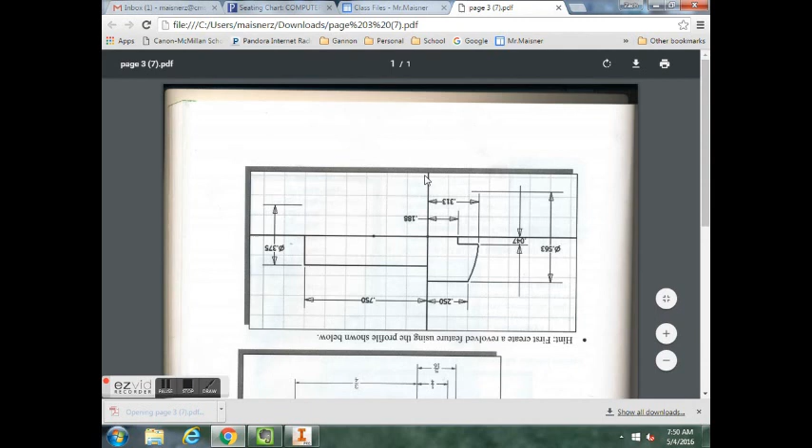If you download that PDF, it's upside down, so just hit the little arrow button so you can rotate it around.

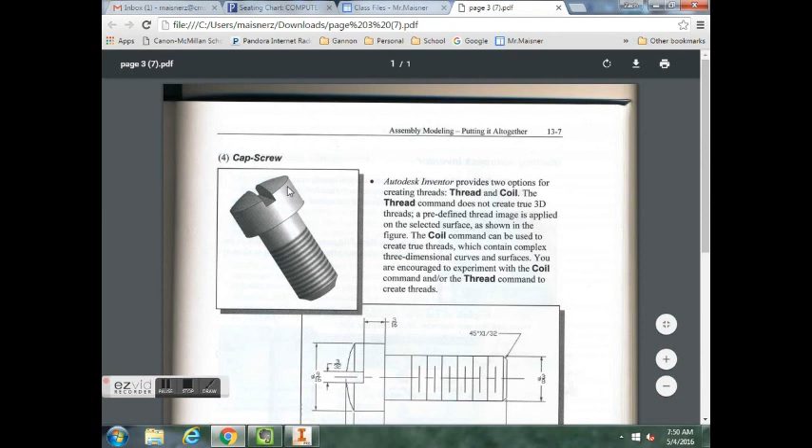This is what the cap screw is going to look like. There's two different methods to do it. We could use the Revolve Tool, create this bottom drawing, revolve it on a center line, or we could just do it the way that we're used to by drawing circles up. We're just going to stick with that method for right now. We're going to use these measurements up here in this top part of the drawing. This down here is for using Revolve Measurements, and this is the typical way that we're going to do. So we're going to use these.

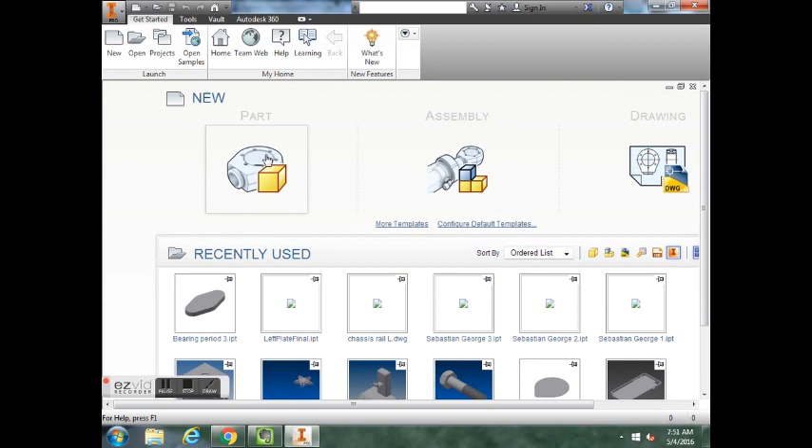So let's go into Inventor, start a new part.

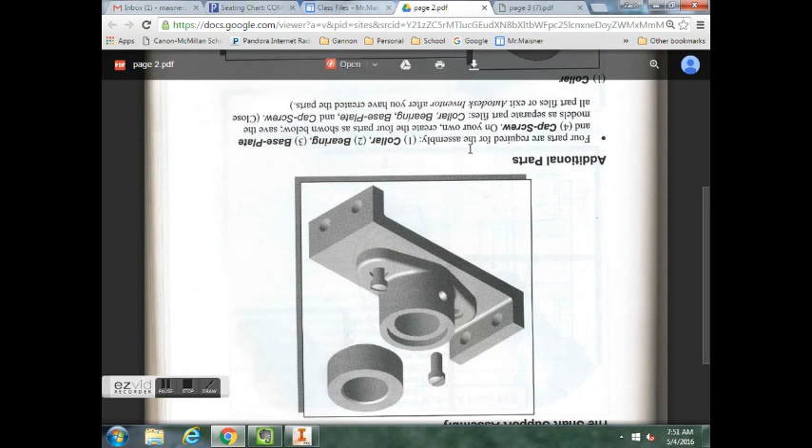Since the cap screw is going to go onto the part straight up and down, if you look back on page 2, I think, this assembly, you can see that the cap screws are going to be up and down, even though this is upside down again. But we're going to select, if you start a 2D sketch, we're going to select the top plane, so that way we can build the screw on a vertical.

So we're going to select this XZ plane, rotate it down. You don't really have to, but if you want to.

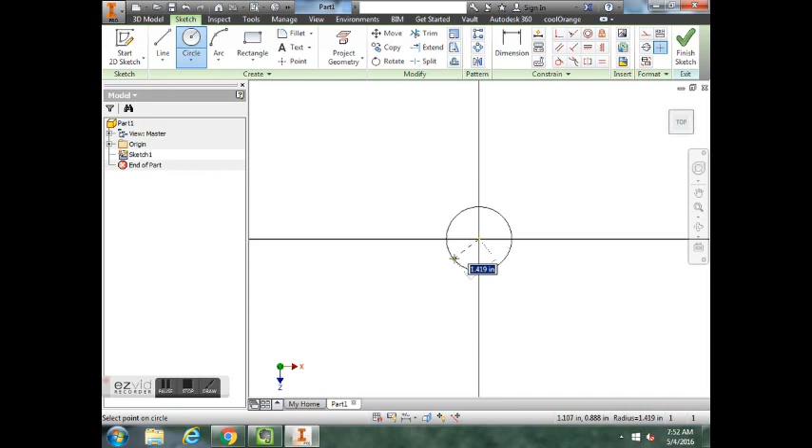So we'll start with a circle in the middle. Wait for that little green dot to pop up. Left click once. As we drag our circle out, we'll look for the measurement on the PDF page.

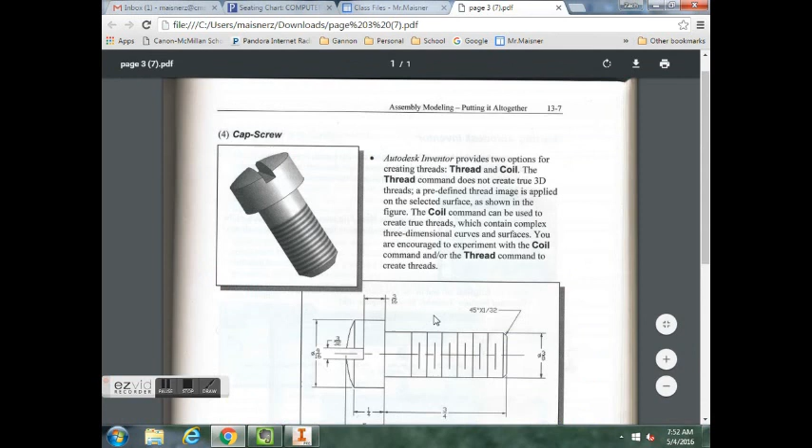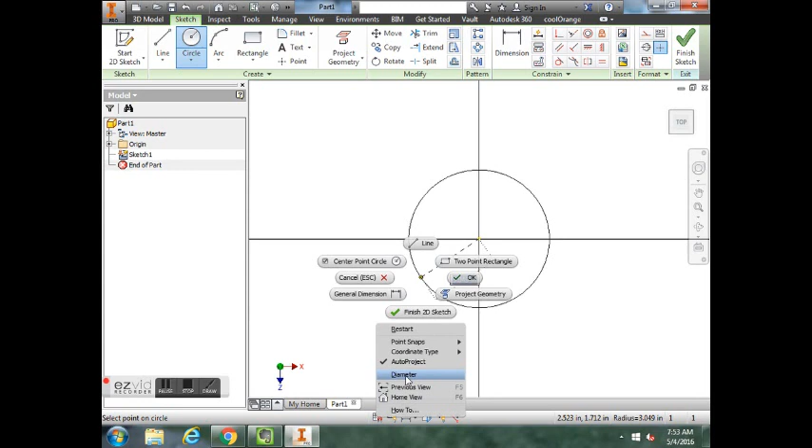So the first one is 3/8. So we're going to make this bottom part first. So we'll go 3/8, and we are going to extrude that 3/4 of an inch. So this would be 3/8 diameter. So if you're in the radius, you're going to right click, change your measurement to diameter, 3/8, and then hit enter.

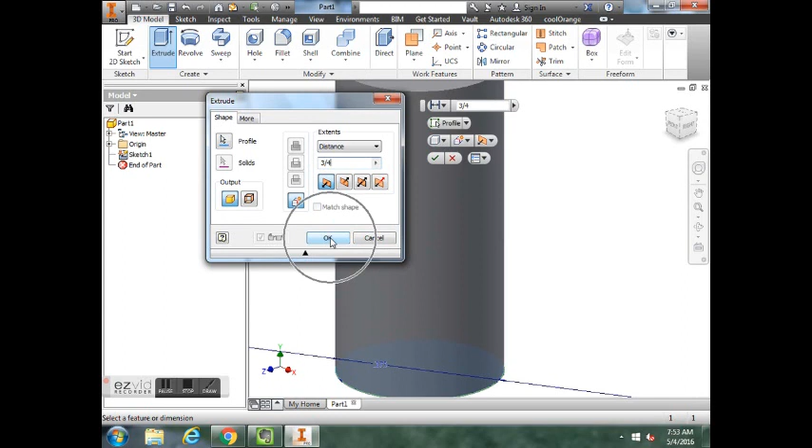We will finish that sketch. Extrude a distance of 3/4, and then hit OK.

So now we have the bottom part. Now we need to create this little top part. So we're going to select this top face and create a sketch on that face.

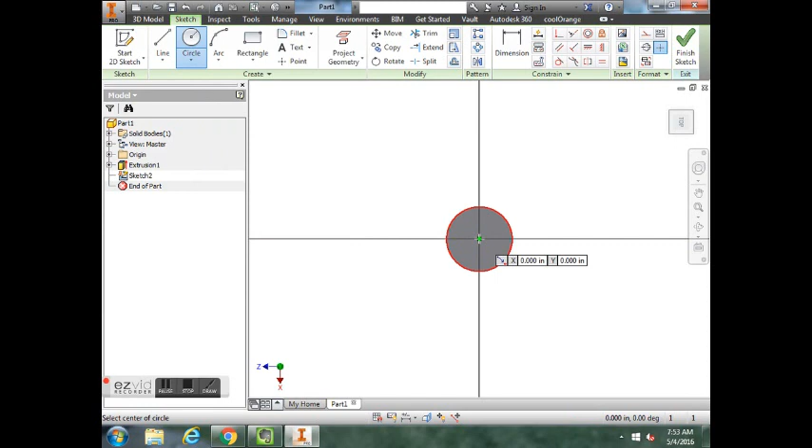We're going to use the circle button again. From the middle, we will left click and drag out, and this measurement will be 9/16, and it'll be an extrusion of 1/4 inch deep. So 9/16 is our measurement here.

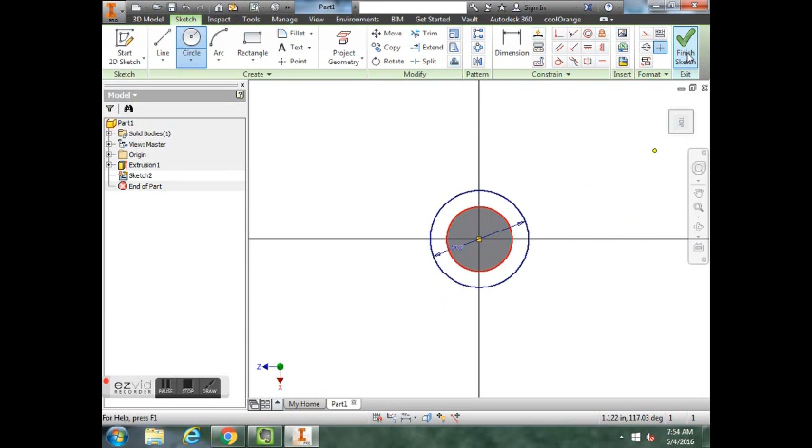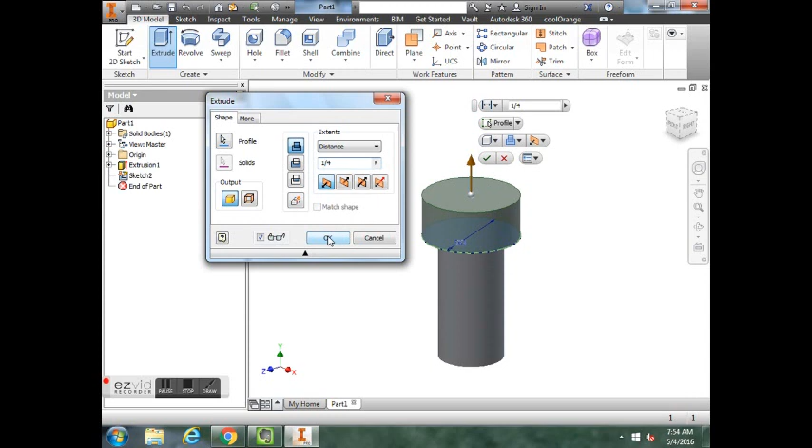We'll then finish this sketch, and we will go up to the extrude button. It's already starting to bring this up, and this is going to be 1/4 inch, and we're going to hit OK.

So we have the part up top and then the bottom. So the only thing we're missing now is this rounded section right here at the top. And for this, we're going to use a new command called Revolve.

So just like the bearing, we have to create a work plane, because you cannot draw on a rounded surface. You have to create a work plane to work off of. So if you go over to the origin folder in your model tree over to the side, open up that folder, select the YZ plane.

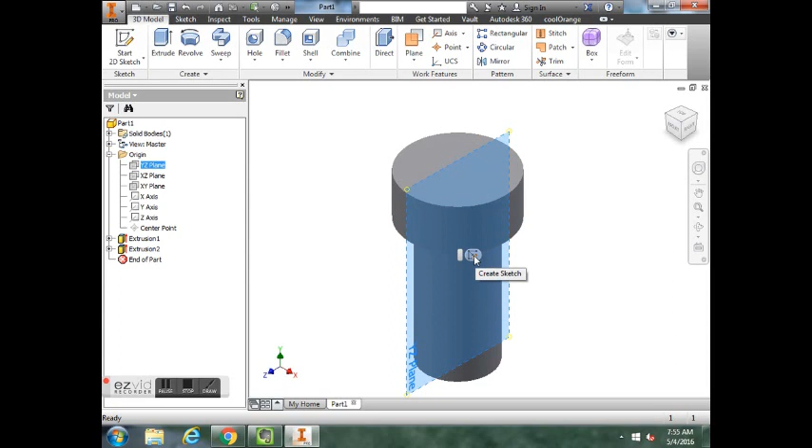And then there's this create a sketch. We're going to create a sketch. So right now we're in the middle of this object. And what we're going to do is we're going to draw a line. So select line.

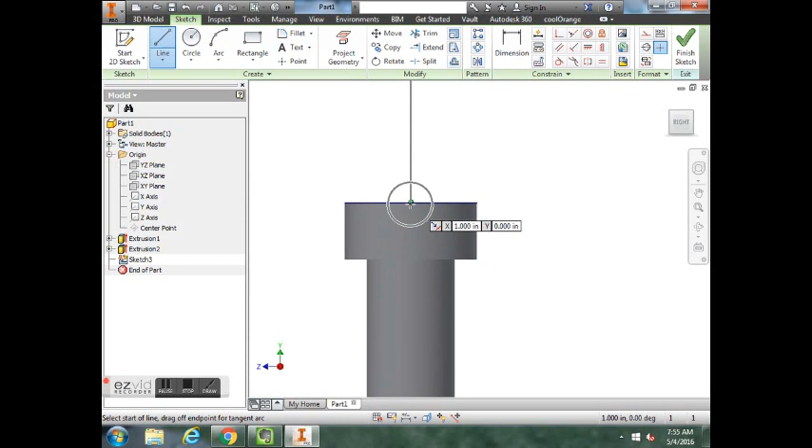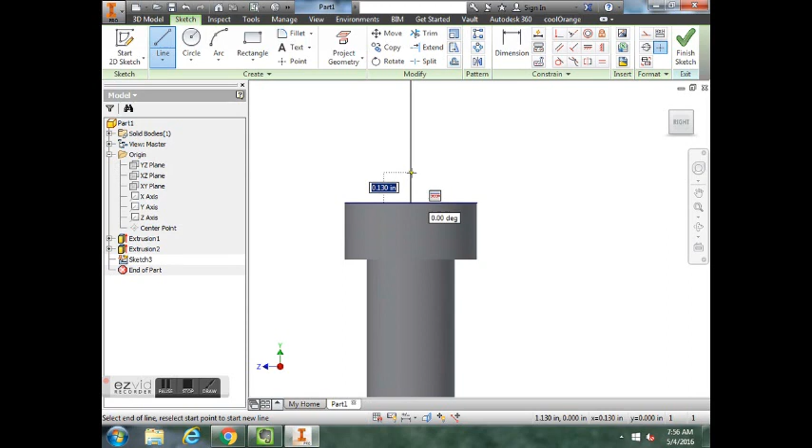And we're going to wait for the snap to appear here in the middle. So left click once. As we move our cursor up, we're going to make this go up 5/16. So 1/4 from 5/16 should be 1/16. So we're going to have this go up 1/16. Hit enter.

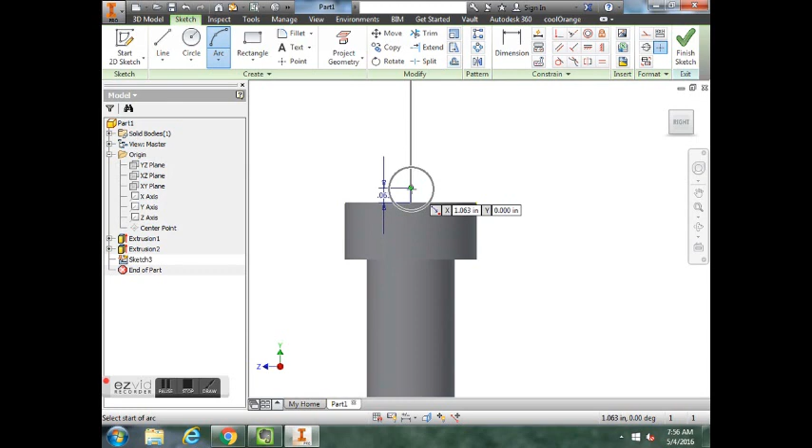And to get the nice smooth round surface here, we're going to now use the arc tool, a 3-point arc tool. So select 3-point arc. Start your arc on the top of that line that you just created. And select the right edge of your screw. Once you click there, you're going to notice it's starting to make a rounded edge.

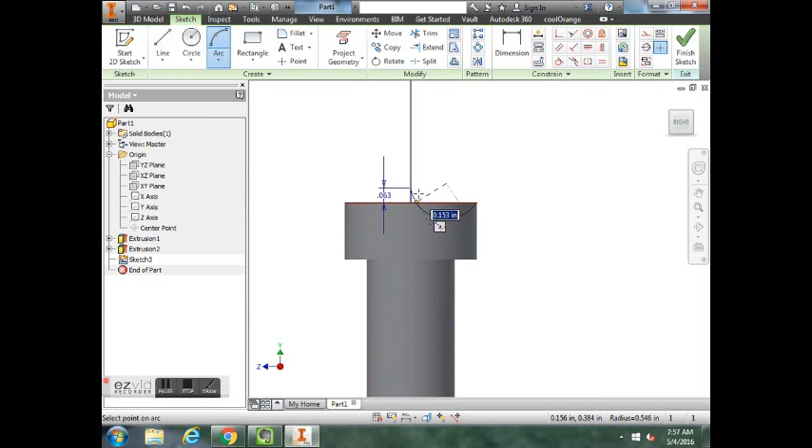We want to make that 9/16. So as you move your cursor, you don't want to have it come up here or down here. You want to make sure that the arc's kind of going like this, and type in 9/16.

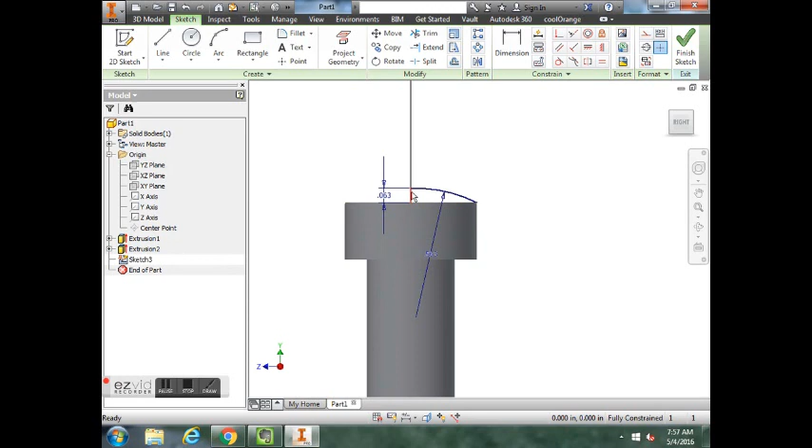Hit escape a couple times. Now we have a profile that we're going to try to revolve. So you're going to finish this sketch. You can see that we have from the center this little profile. We're going to use the Revolve Tool.

And once you select the Revolve Tool, a dialog box will pop up. And right now it's telling us to select the axis. If you look here, the axis button is highlighted blue. So the axis would be, how do you want to revolve it about? So you'd want to select this vertical line right here, so that way it'll revolve around it.

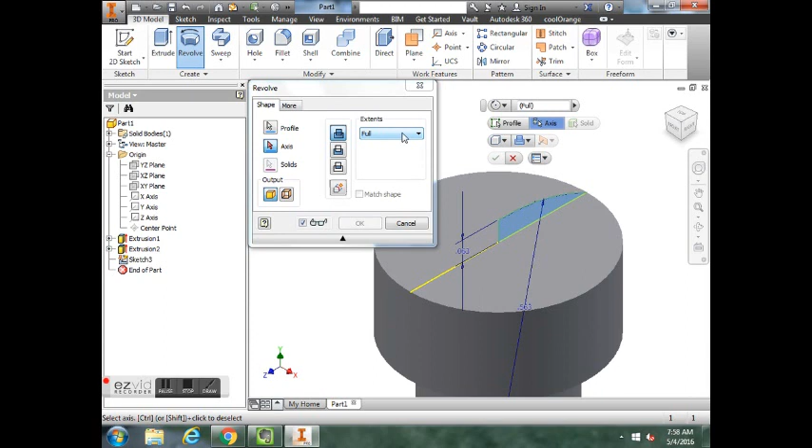And you want to do a full revolution, so all the way around. So once I select this, you can see it's starting to create a rounded surface all the way around. You could even look in a different view, see how nice and round it is.

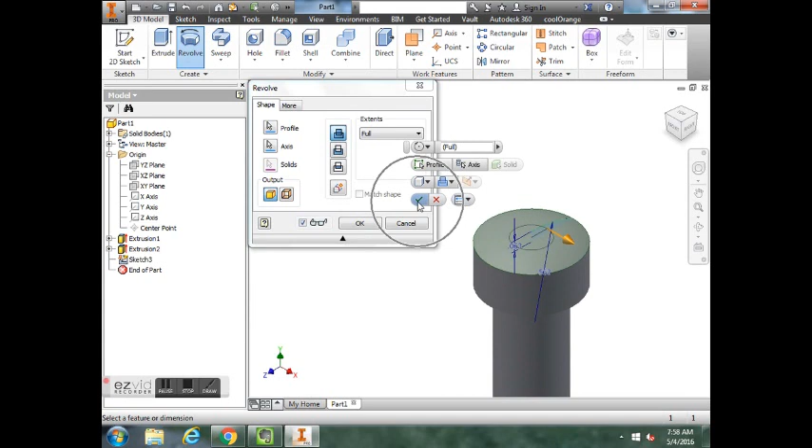Then we're going to hit the green check box or the OK button. So now we have this round part.

The next step will be to create the slot, so you could use a flathead screwdriver. Right here is the slot, which goes down 3/16 of an inch from the bottom here.

There's a couple different ways that we can do it. The way that we're gonna create this will be to create a work plane 5/16 of an inch up, and then we will extrude a rectangle down into it 1/8 of an inch.

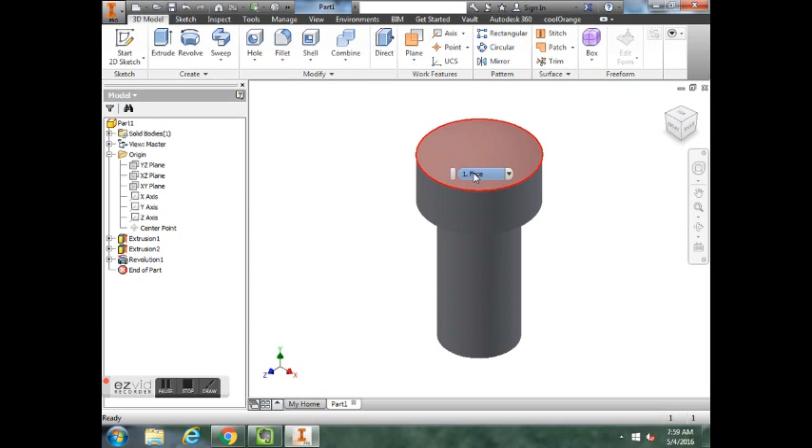Okay, so again, you can't draw on this surface. If you notice, I move my cursor here, you can't create a sketch on a rounded surface, so we need to offset a work plane in order to draw here.

So what we're going to do is come up here to the plane button to pull down, and we're going to select offset from plane. You're going to select that button.

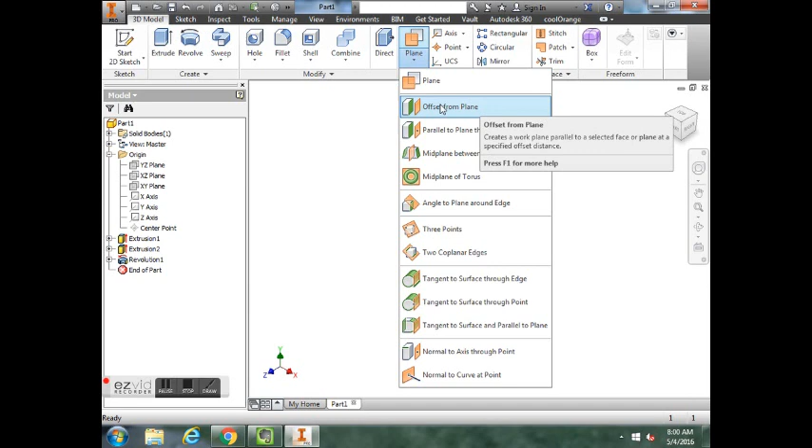As we move our cursor towards the bottom right here, of that top part of your screw, you'll notice that it's highlighting a work plane. So there's a work plane that we can offset up. Let's go ahead and click on that.

Right now the arrow is going down, but we want it to actually go up, so we're going to type in a negative number. We're going to go negative 5/16.

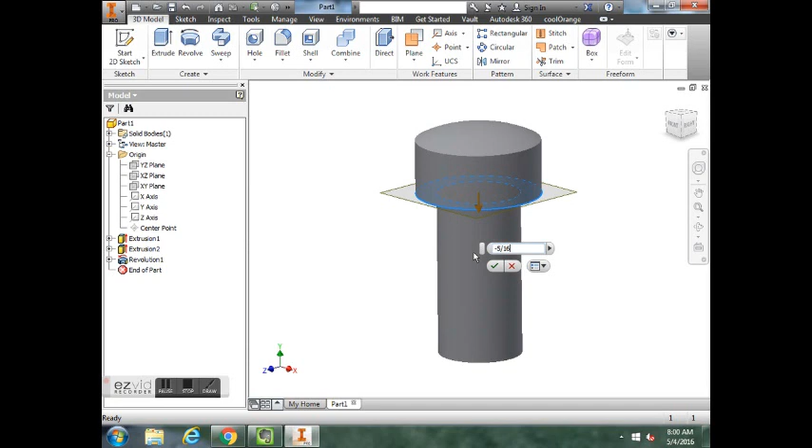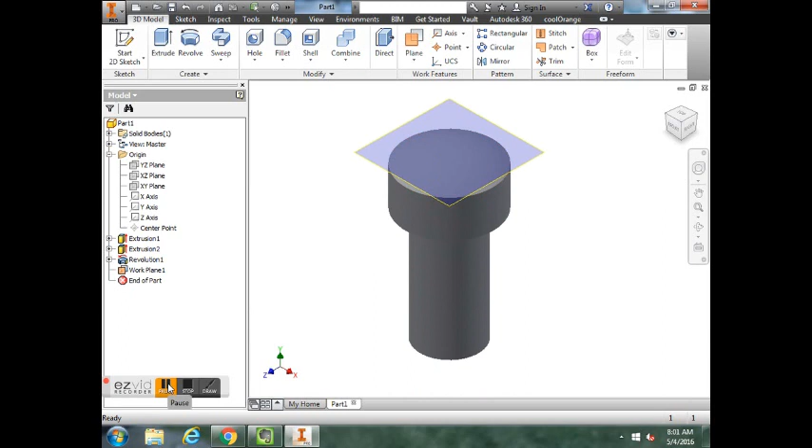After we've done that, we are going to create and offset a work plane, and we're going to offset this work plane negative 5/16, and that'll allow us to have a work plane located here at the bottom of this slot that we will extrude up.

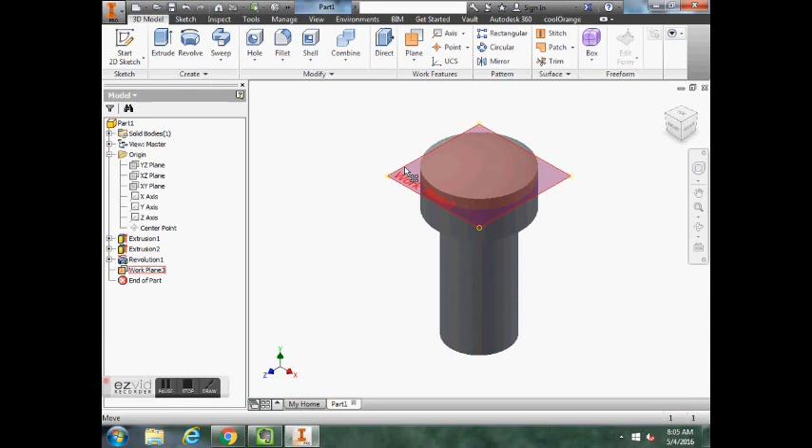So we will create a sketch on this work plane. Once we've created the work plane, simply click on it, hit the create sketch button.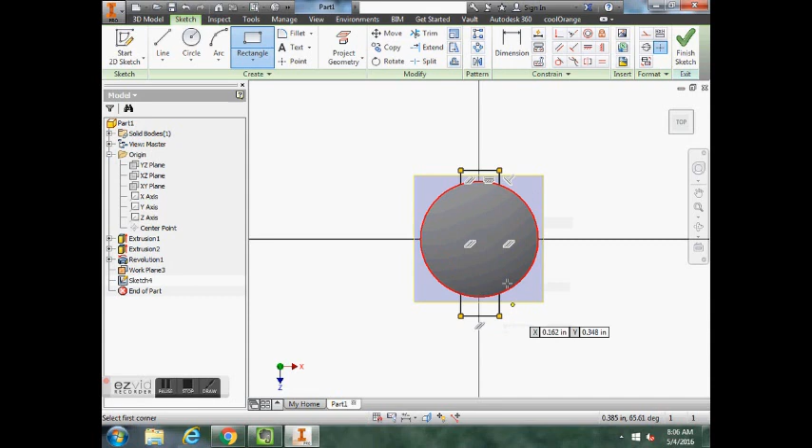What we're going to do is draw a rectangle that's going to be above and to the left center of this cap screw, and then to the bottom right past it, so that way we know we're going to cut away from it. So something like this. Doesn't have to be perfect.

We're going to dimension it next, so hit the dimension tool, and we're going to select this right vertical line, and as you move your cursor towards the middle, you'll select the point. The little point will appear, and you're going to dimension and tie this down 0.047

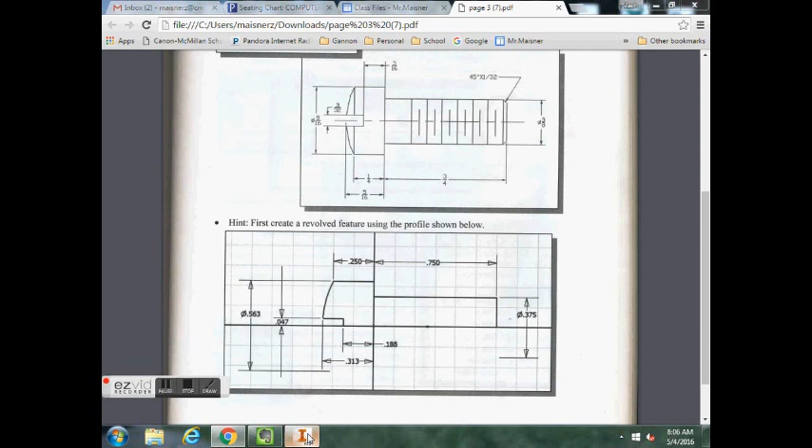on both sides. I got that measurement from here, from our drawing example. So we'll use the dimension tool again. This vertical line on the left to the center, 0.047. And it's okay to have the rectangle go past the object like this.

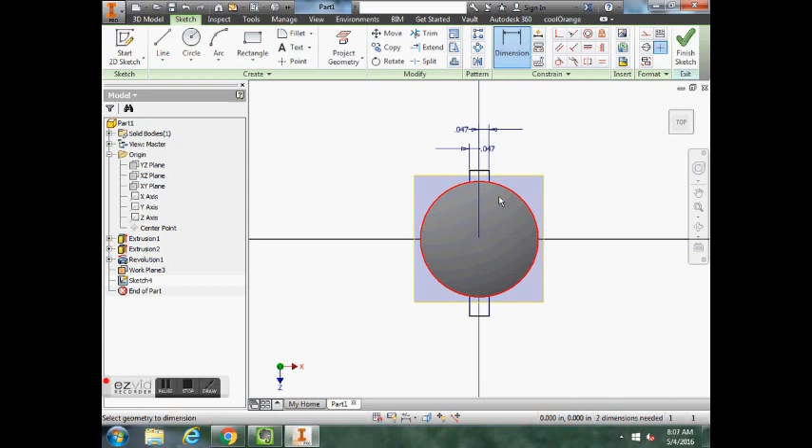We just want the width, because we already have a starting point, which you'll see in a second. Once you create this rectangle with the 0.047, go ahead and finish the sketch. You can see it'll start right there.

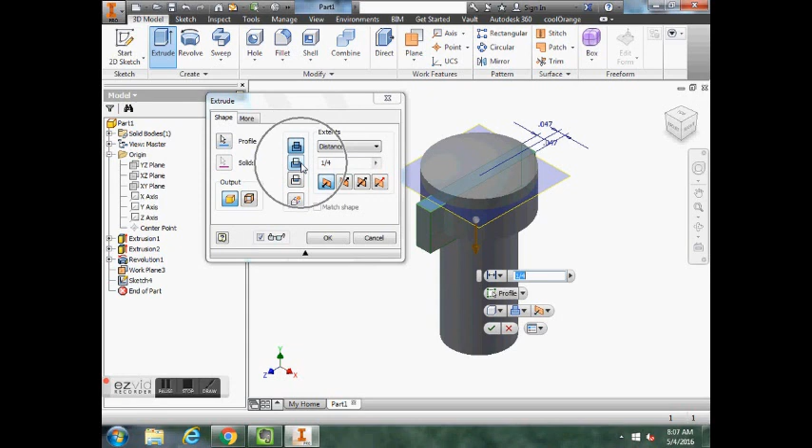We're going to use the extrude button, but we want to cut, so we're going to use the cut button. You can see here in the example that it's already starting to cut it away. You can change the extent distance to all, so that way it cuts the top part of the cap screw out. And then we're going to hit OK.

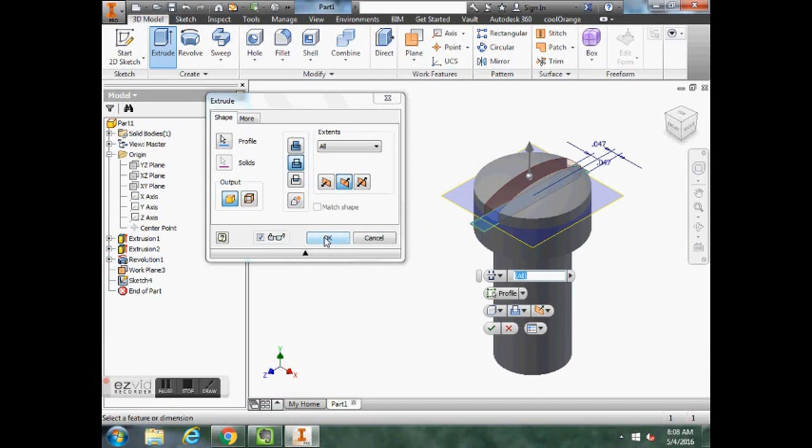And you can see that we have our slot created now. We can hide this work plane, so we don't really need it anymore. You don't need to delete it. You could just come over to your model tree, right click on it, and then uncheck the visibility.

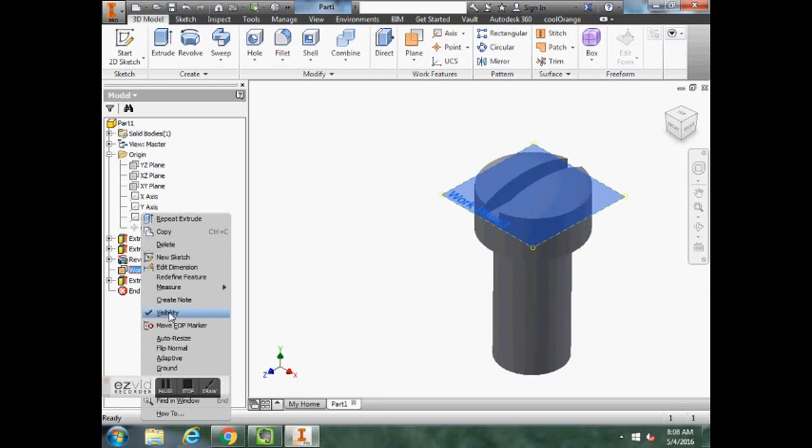Just a couple more steps to finish this up. We're looking at our example. It has a chamfered bottom, 45 degrees and 1/32 distance.

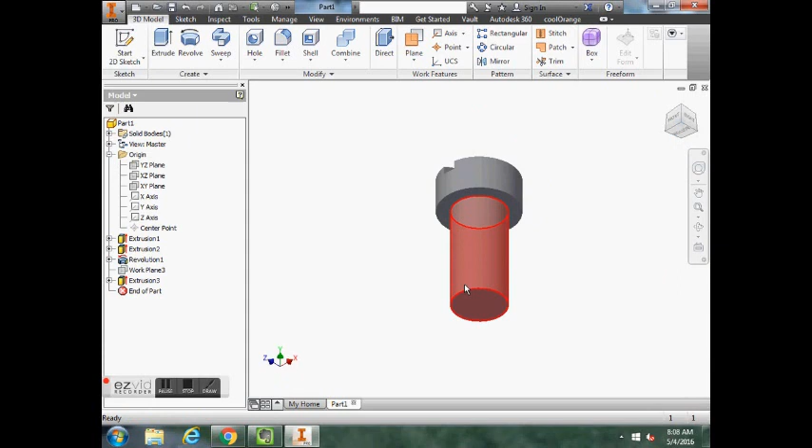So using our view cube, if we create the view towards the bottom, we'll go underneath the fillet button to the chamfer option.

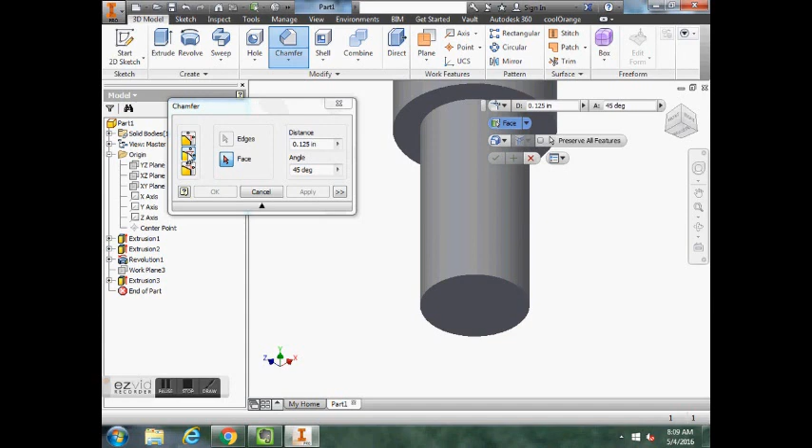Using the second option, which is distance and angle, we'll change the distance number to 1/32, and we'll leave it at 45 degrees.

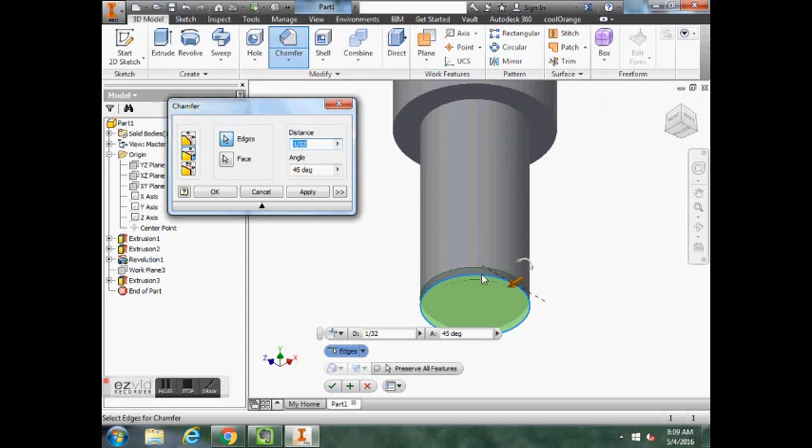We'll select this face at the bottom to start, and the edge, the bottom edge of the cap screw. You can see before you accept, it's going to create a chamfer at the bottom. We'll hit OK.

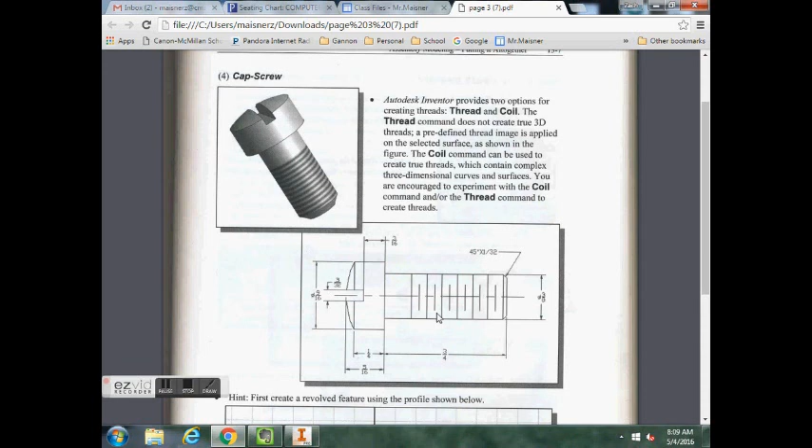Lastly, we need to thread this. In the drawing example, it doesn't give you the thread designation, but the thread designation was on the base plate. So if we were to open up the base plate, you can see here's the thread designation, 24 UNF 2B.

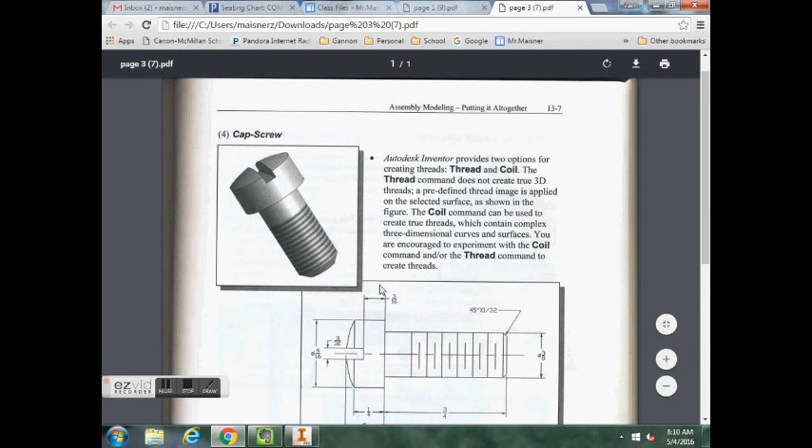I don't know why they don't provide it again in this example. It's just a drawing example. So we're going to use these same threading because that's what it's going to be used for.

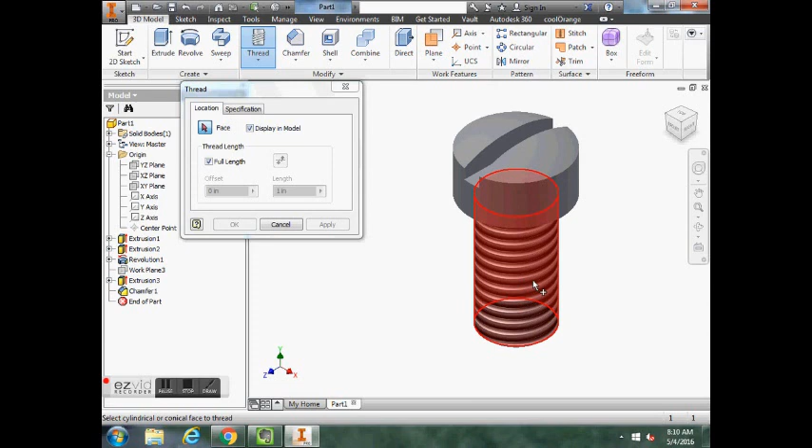We'll go underneath the hole button. There's the thread command. As you move your cursor onto the screw, you can see it's starting to thread it for you.

So if you just left click and then underneath the specification tab, we're going to change this to 24 UNF. You want to keep this at 2A because the other one is 2B, so this should be 2A.

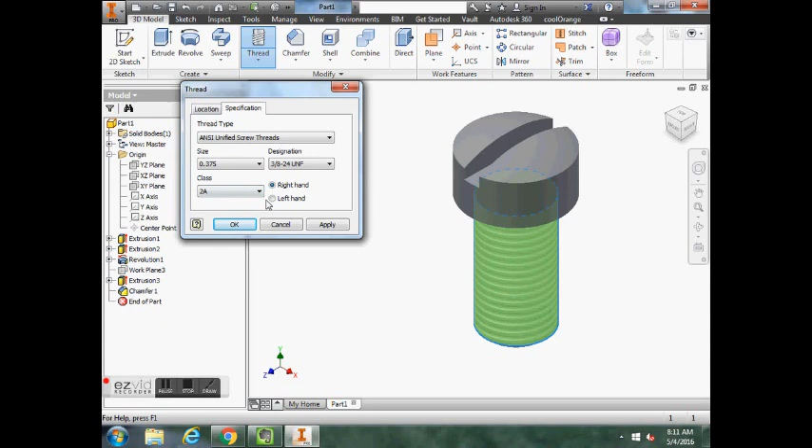Hit OK, and you have your cap screw finished.